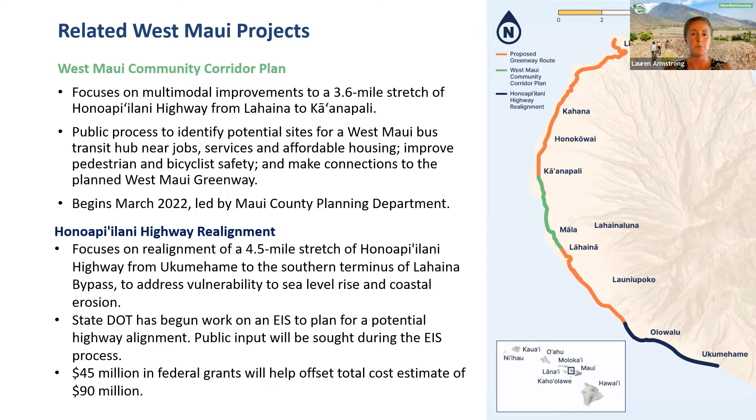Another important project to mention is the Honoapi'ilani Highway realignment. This is a stretch of the highway that needs to be moved inland between Ukumehame to the southern terminus of Lahaina Bypass. This is something the State Department of Transportation is working on. They are seeking public input through their environmental impact statement process, and will have a lot of overlap in terms of planning for the Greenway in that area. So we're also coordinating closely with the state around that effort.

The project vision is to create a safe, comfortable, and joyful greenway through West Maui that serves as a multi-use path connecting people to destinations while highlighting the diverse history, landscape, and culture of the region. The goals that support that vision are to foster community, to bring joy, to strengthen connectivity, to promote safety and comfort, and to ensure feasibility.

Some of the progress we've made on the West Maui Greenway Master Plan over the past few months: we've looked at options for operations and maintenance of the path, governance, as well as different guidance for the design of the path. We've done a lot of work around the alignment of the path, where it should go based on a number of criteria, as well as meetings with landowners and different stakeholders.

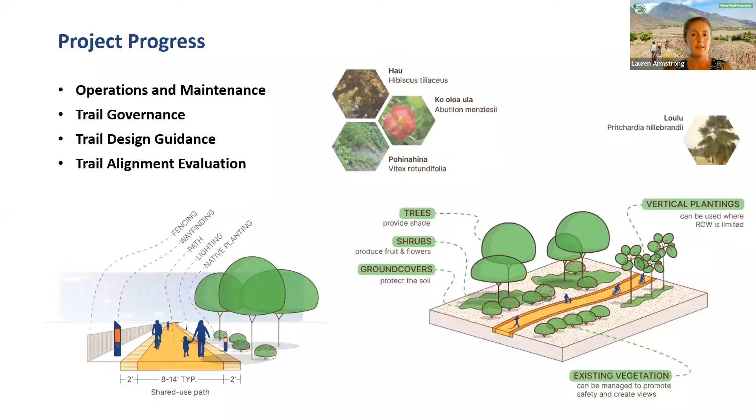Thanks all. So Vesna and I, project manager and principal from Alta, will be walking through the next sections. We're going to start by recapping some of what we heard in the last round of community engagement, and then we'll jump into some of the preferred alignments. Vesna, do you want to walk us through some of the things that we heard last time? And I can weave in how we apply those to our design thinking.

Yeah, absolutely. Our last meeting in March, just a few months ago, a quick recap of who was there and what we heard. We had 32 meeting participants, 52% of the participants live in West Maui, with 44% living in West Maui and 8% both living and working there.

We also asked all attendees which project goals are the most important. You heard Lauren explaining what the project goals are for the project, and overall, promote safety and comfort was voted as the most important project goal. People had the opportunity to choose two, so the next three were actually tied: strengthen connectivity, ensure feasibility, and bring joy. Last but not least was foster community.

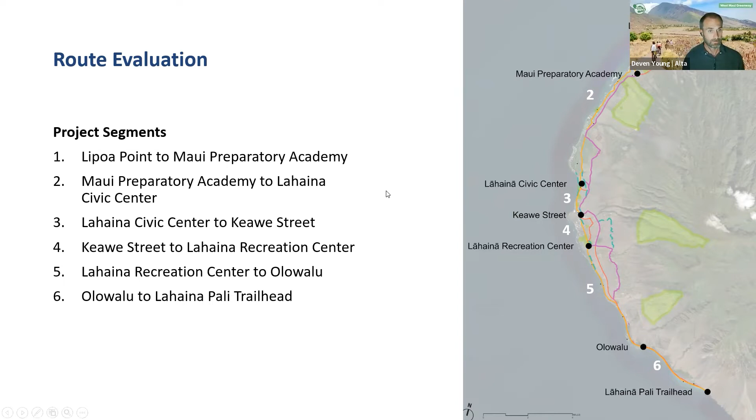So the way we're going to present this—I know you're leaning in to look at these maps—we've got three slides that we'll be walking through. The first slide looks at the alternatives associated with the segment, so this is Lipoa Point down to Maui Prep. The slide after that looks at the evaluation results of that particular segment, looking at how alternative A scored relative to alternative B on these criteria.

And then the third slide, the final slide for each segment, shows the preferred alternative—what rose to the top—and that's the one we've zoomed in on, so you can get a real clear picture of what's rising up as the preferred alternative.

I will note, in some instances these segments are pretty clear cut—we had clear cut winners. But in the case of a long greenway, there's a lot of complexity, right? There are certain segments where alternative A, alternative B, or alternative A and C, or B and C, are actually both considered to be the preferred alternative. The reason is that there are two key criteria where there's some uncertainty right now.

One is on planned projects, timing for planned projects. Lauren had mentioned some of these other projects that are going on. There may be great opportunities to actually link up the West Maui Greenway with the development of another project, but we're unsure where that project is in terms of its implementation schedule. So we didn't want to rule an alternative out that could score very well if a corresponding adjacent project is being developed—we don't want to miss out on that opportunity.

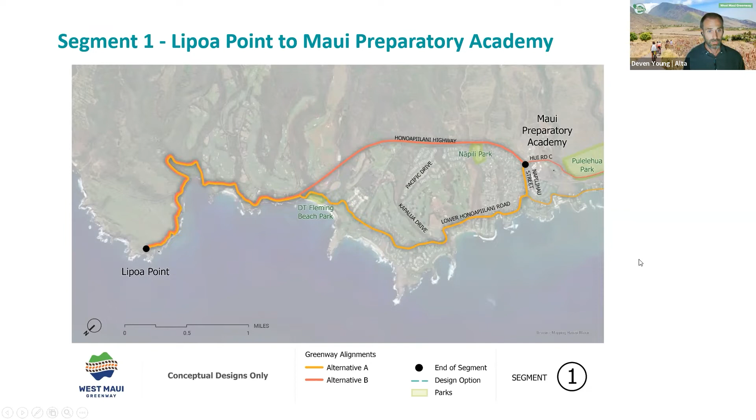So those are the two alternatives for this segment. In terms of our evaluation criteria, alternative B was the top performing, the upper road. A lot of that has to do with promoting safety and comfort. The way this table is organized, a dark gray square scores really well, and a light gray or white rectangle scores poorly.

Promoting safety and comfort, this upper Honoapi'ilani Highway has fewer intersections. One thing we heard loud and clear is the desire for a continuous and unobstructed greenway. With this upper highway, we have a good deal of right-of-way for the greenway to be placed on the Mauka side, allowing a continuous separated path. That's a significant difference from the lower road, where there are several intersections, lots of driveways, and a lot of potential for conflict. That's an example of one key criteria for why alternative B in segment 1 rose to the top.

I'll go to this next slide so you can get a sense of the sequence. This is the preferred alternative here, hopefully visible in full screen mode. Traveling along the highway, at this break is where the upper road really opens up, and we'd be envisioning a separated path - we'll have images of what that looks like later in the presentation. It would be a fully separated pathway on the east side, the Mauka side of the upper highway.

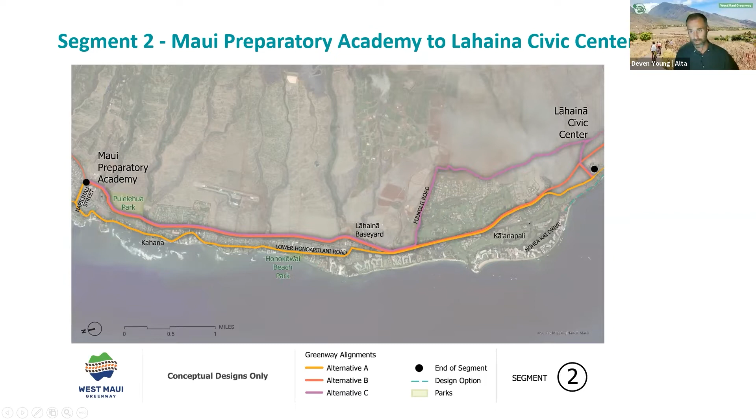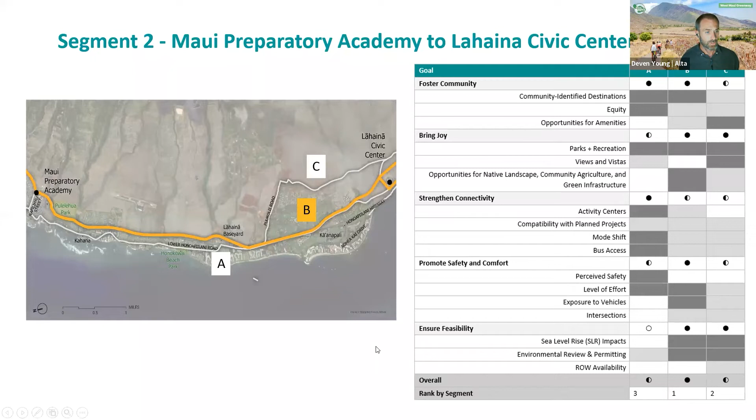There's also a wide stretch there to implement amenities, like landscape or green infrastructure along the corridor - that was a key priority. We also looked at environmental review and permitting. This one scored best and seemed to have the least obstructions in terms of environmental review and permitting.

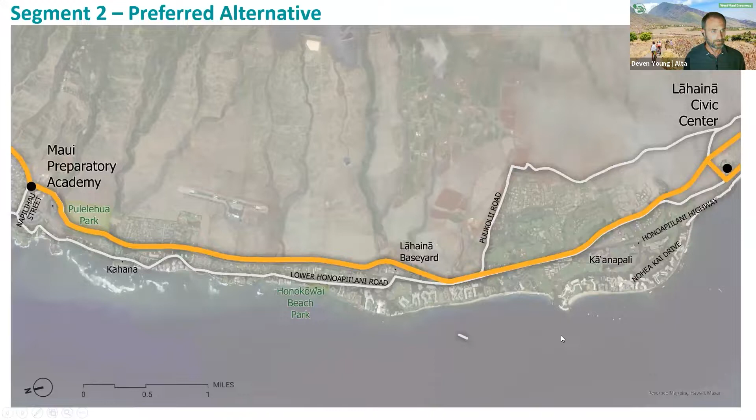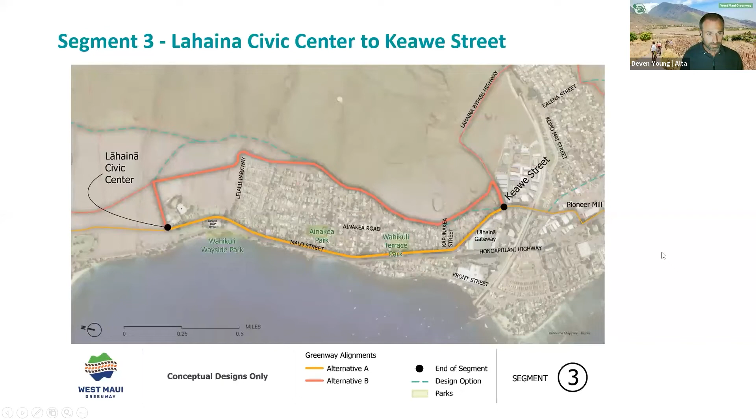So this is an instance where we've really got two alternatives that bring a lot of value. When we first did our initial evaluation, Alternative B scored the highest. This is the alternative that navigates up along cane haul road and then drops down into Keawe Street. But a lot of what was impacting the evaluation was some of the right-of-way availability.

When we reran the evaluation and looked at right-of-way availability along Malo Street, they ended up scoring very, very similarly. So this is an instance where we've got two alternatives, both provide merit, and after much consideration and evaluation, we're saying that both of these alternatives are viable and should be carried forward in the master plan as preferred potential alternatives.

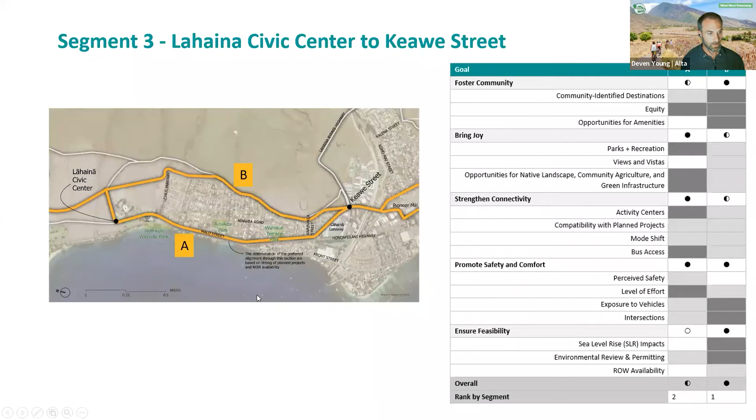So let me go ahead and blow it up here. This is a look navigating from the Civic Center down Malo Street and then up behind Lahaina Gateway, versus the alternative running along cane haul road and then navigating down to Keawe Street.

So two instances where we had our evaluation criteria and our modeling, but as we went back and looked at it and thought about the complexity of this corridor in terms of right of way, we wanted to have an opportunity to keep both alternatives and carry them forward.

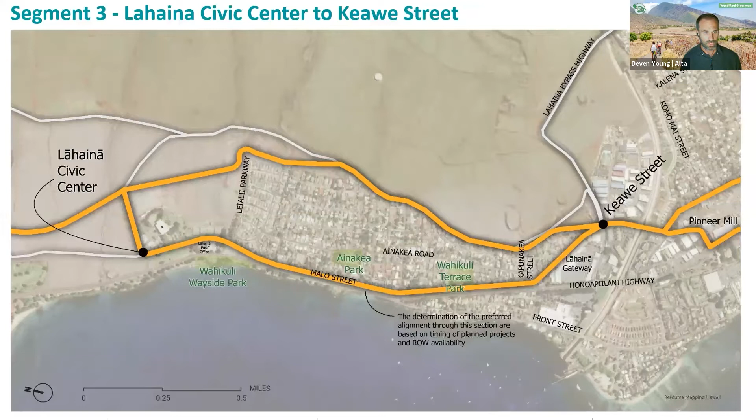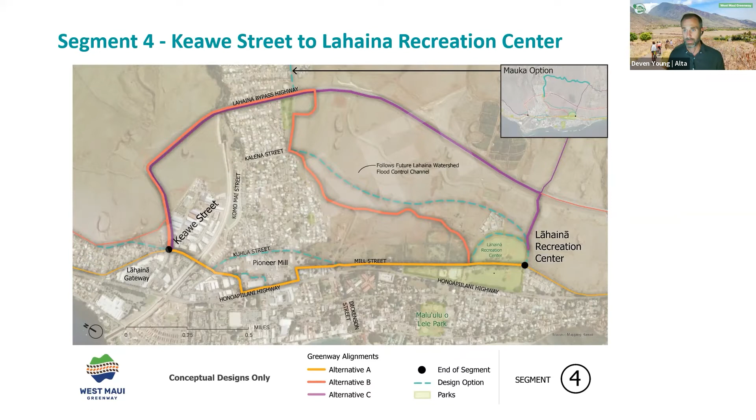And then we have a third alternative, C, that travels up the bypass and then makes a connection down into the rec center. So it uses the bypass predominantly to make the connection to the rec center.

And of the three alternatives that were evaluated in the various design options, Alternative A rose to the top for a number of reasons: things like environmental permitting, perceived safety, level of effort, it's fairly flat, exposure to vehicles, proximity to activity centers. This one scored quite high.

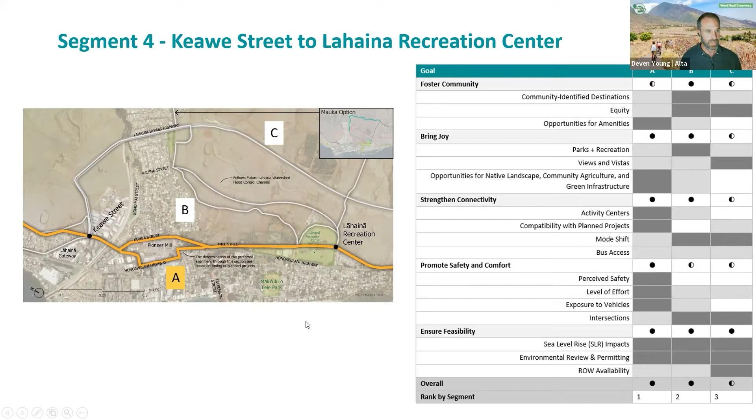And you can see here, we have two alternatives shown. Within Alternative A is the preferred route, and the reason for that is this opportunity for that Kuhua Street extension project.

If that project were to move forward, it would make sense to try to be opportunistic and build the greenway in conjunction with that project. However, in the meantime, there are alternatives that travel down along the train tracks down to the highway, and we want to keep those options on the table as well. So those have been fully vetted, but that travel into Mill Street and make that connection to the rec center.

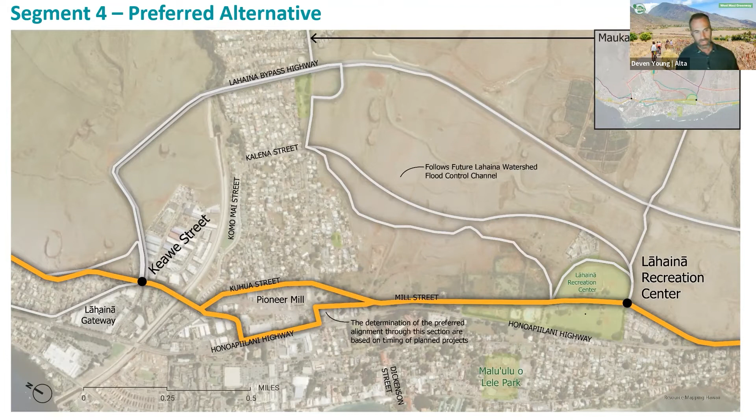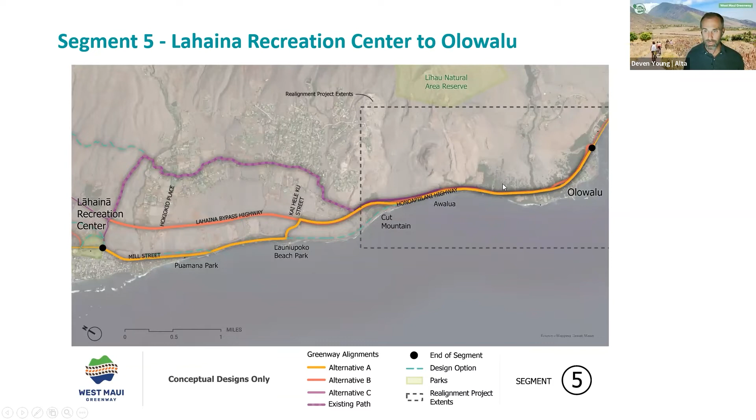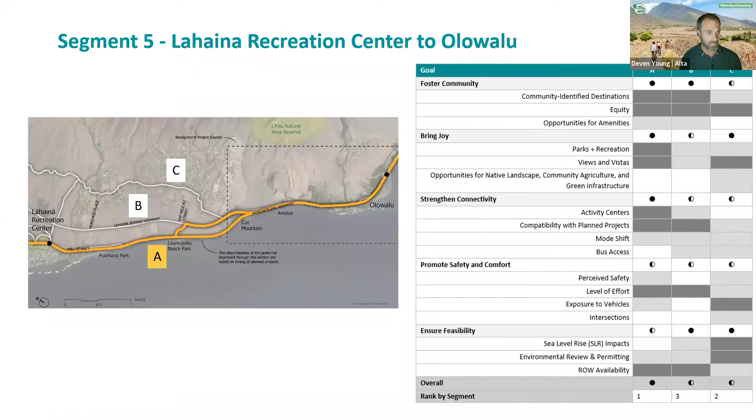In this instance of segment 5, alternative A was the top performer. You can see variations here, but alternative A scored well on opportunities, access, parks and recreation, direct access to Launiupoko Beach, level of effort since it's the flattest route, and right-of-way availability—much of it travels along public right-of-way, a lighter lift than some of the other alternatives.

Let me zoom in here. Just to go through the variations between this split for alternative A at Launiupoko Beach, it's really predicated on the realignment project.

Because if the realignment project were to come through, out by Cut Mountain, you could carry forward along the lower highway, and when the realignment project is done, a lot of vehicular traffic would move off the lower highway and onto the bypass or new highway alignment, making that a pretty seamless connection. But there is uncertainty around when that project will happen.

So an alternative is at Launiupoko Beach to travel up Kai Hele Ku Street and use the existing signal, because from this signal there's actually a pathway adjacent to the current highway that was built as part of the bypass project. You could use that signal and tie into that existing path.

Then travel potentially along cane haul road, but in the case of the realignment, along the current lower highway, which would have much lower volumes and become much more enjoyable to ride, having a fully separated path adjacent to the highway just by doing some reconfiguration, since traffic volumes will be so much lower. So those are two variations, and they really depend on other project schedules.

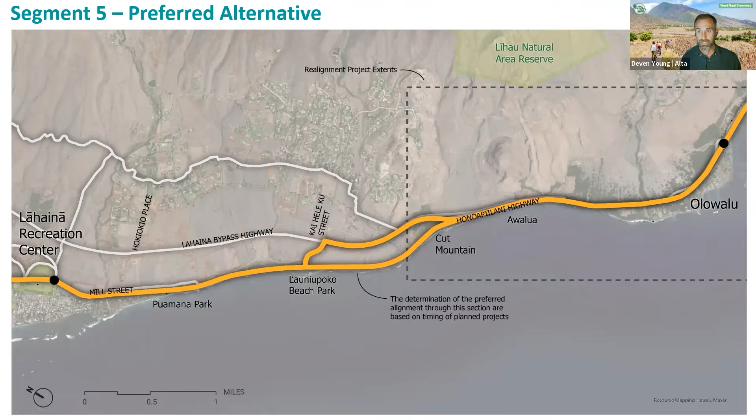But overall, alternative A, following the Mill Street alignment and the lower road, is the preferred choice.

And then finally, segment 6, which goes from Olowalu down to the Lahaina Poly Trailhead. We have two alternatives here: alternative A, which follows the highway.

There is space available, and there are existing crossings too at some of the streets that intersect the highway that are already striped, so that's an option. Or alternative B, which is the cane haul road.

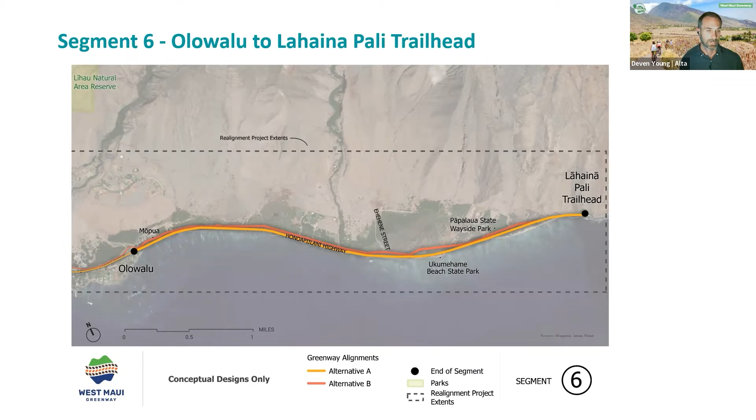Keeping in mind that if or when this realignment project goes forward, that would take a lot of vehicular traffic off the existing highway and open up a lot of opportunity for placing a greenway adjacent to the highway.

In this instance, alternative A was the highest scoring alternative, and a lot of it has to do with access to parks and recreation—there's direct access into Ukumehame Beach.

The level of effort is low since it's fairly flat, and there's lots of right-of-way available. And if or when the highway realignment project comes through, it would make this a very comfortable route in terms of level of stress for greenway users.

So what does that look like here? That's a blow-up going from Olowalu to Lahaina Poly Trailhead.

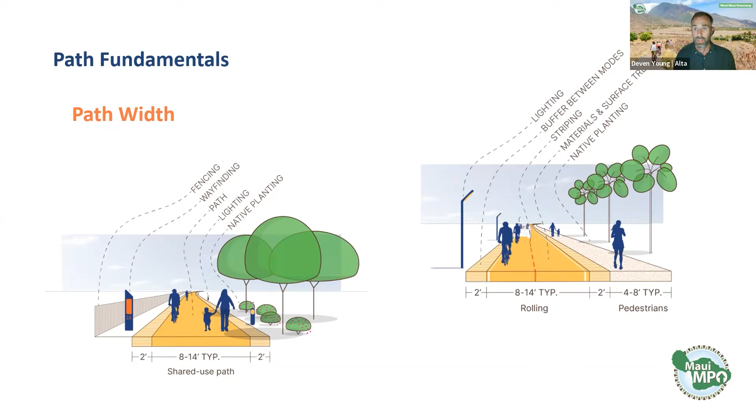When we're considering the greenway, we're considering two types. There's the shared use path, where the minimum path of travel width is 8 feet with 2-foot buffers, so 12 feet total. In that instance, bicycles and pedestrians intermingle on a shared use path. We talk about shared use paths being implemented in areas typically where there's fewer modes and fewer users.

The alternative is what you see on the right here, in instances where there are more people using different types of devices - bikes, potentially e-bikes, people walking, pushing strollers, walking their dog. We promote the separated path. In that case, you have about 8 to 14 feet potentially for rolling users, and then a dedicated pedestrian path of 4 to 8 feet. Typically it's a soft surface, crushed gravel, something friendlier to walk on and roll a stroller on, but less friendly to people riding bikes. It's a way to use a design feature to create a safer, more pleasant corridor for a range of users.

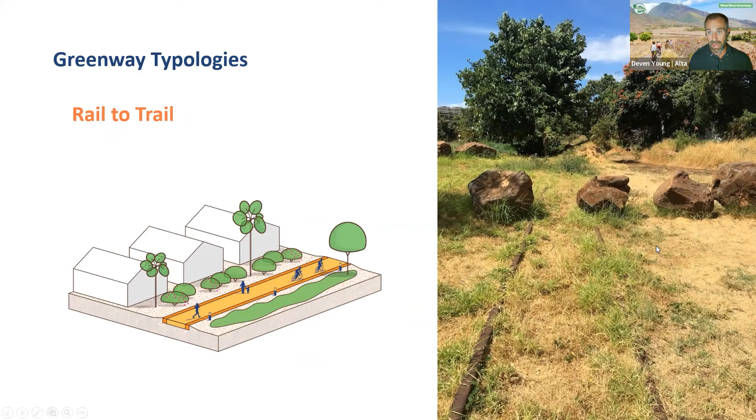So those are the two path width types we're exploring. In terms of the types of path, it was brought up - is the path going to be like this image behind me, this fully separated path? In the case of something like a rail-to-trail or the Mauka Cane Haul corridor, yes. This is an image of the existing sugarcane train tracks, where there's a corridor fully separated from the highway. In that instance, you could implement either a shared or separated path along this corridor.

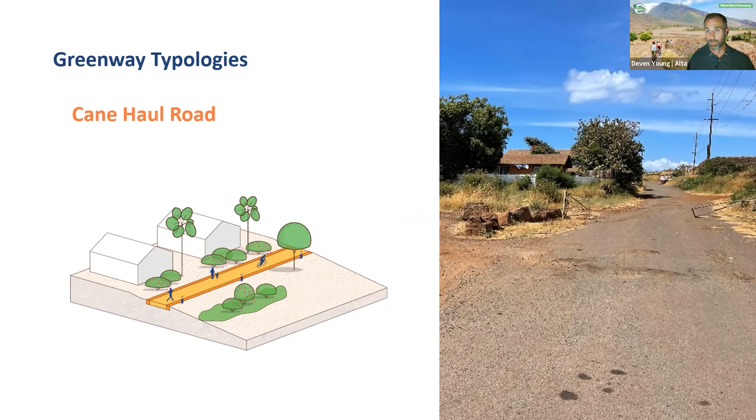Same for the Cane Haul roads - I brought those up. This is an image of the existing Cane Haul road, translating into a dedicated, either shared or separated path fully separated from vehicular traffic. This is an example of the Mauka, more upland Cane Haul road, potentially a bit narrower. We see this farther away generally from activity centers, so it's probably better suited to a shared use path.

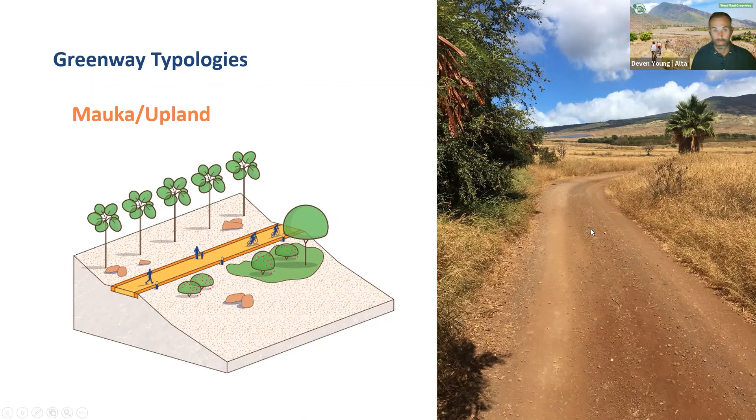This is an image along the preferred alignment that I showed you that's out there. This is what we're describing when we talk about the Cane Haul road in an upland or Mauka environment.

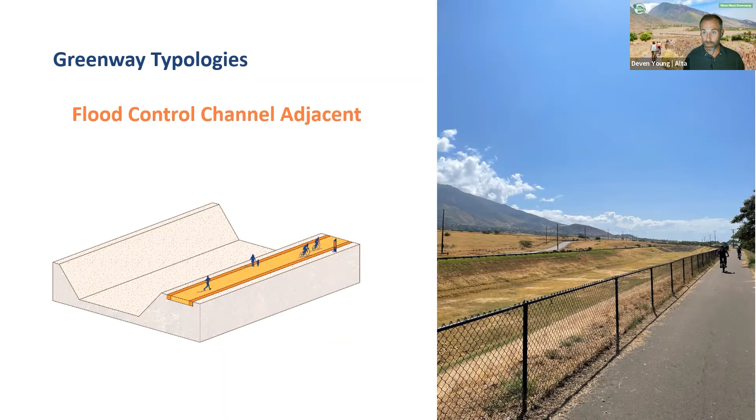In this instance it's a lower volume road, but what we'd propose is likely grade separated, meaning curb height. The greenway would be at curb level, separated by a buffer. We're promoting a minimum of 5 feet for heavier volume roadways like a highway, and a minimum of 3 feet for lower volume conditions. That buffer can be filled with landscape or other barriers to add safety.

This is also along the preferred alignment route that we showed earlier in those maps.

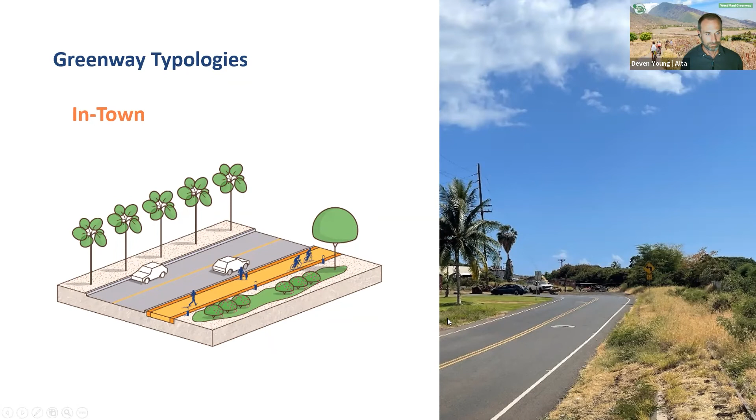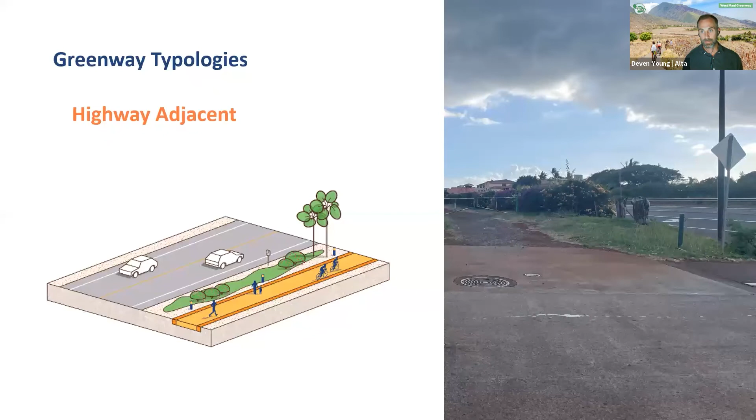There are other instances where we'd need to develop and implement that buffer as part of the Greenway project, and in those cases it would be a minimum of 5 feet. We're still trying to create that fully separated experience, even within the same corridor and proximity as the highway.

We'll be discussing in the master plan implementing green infrastructure as part of this Greenway corridor. The Greenway can provide multiple benefits, and really that's what we're seeking to do—yes, to implement something that gets people from A to B. I think that's our base goal, and that's what we're trying to promote.

But there are other opportunities and funding streams that could support things like additional native planting or integrating cool paving, shading features, and so on, to make the user experience nicer. These are opportunities that could be explored in and along the corridor, using ulu or noni native trees and shrubs and ground cover to promote habitat and more drought-tolerant planting.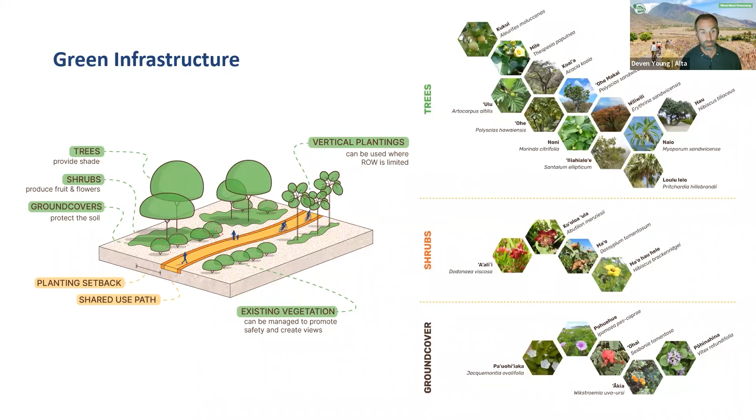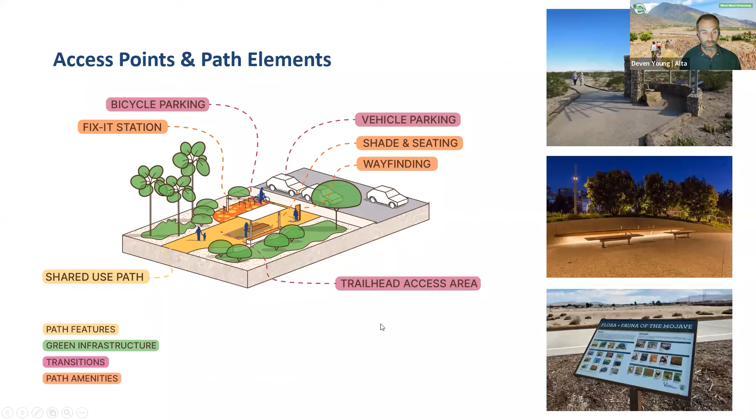We'll have several access points. As you exit and enter the greenway, there's a lot of opportunity for things like bike racks, shading, kiosks with interpretive signage, and lighting to make it more comfortable to jump onto the greenway. Those elements are being considered for the West Maui Greenway and will be included in the master plan, along with important wayfinding components.

There are stretches of the greenway that largely exist already, and wayfinding will be a really critical component to knit the entire corridor together—things like kiosks, but also decision signs and turn signs, so as you travel down the corridor it directs you into Lahaina town or to other key destinations.

To give you a sense of the separated versus shared condition—this is looking at the existing image with the sugarcane train car off in the distance. This would be a separated-use pathway with dedicated space for rolling users, plus an adjacent pedestrian path with potential shade structures, seating areas, native planting, and lighting along the corridor.

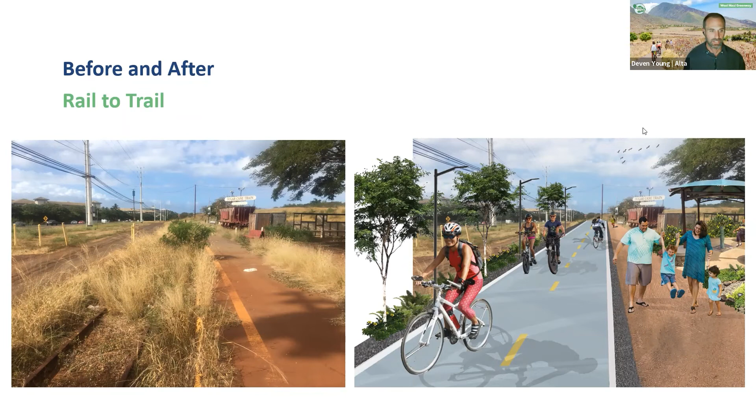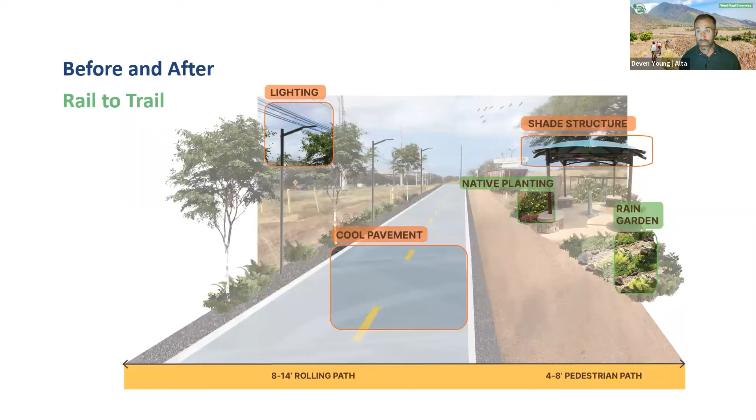To give you a better look at the key elements, this is the 8 to 14 foot rolling path with a 4 to 8 foot pedestrian path. That space is available out there along the sugarcane train track alignment, so that's something we're considering.

Versus a more mauka alignment, where destinations are farther between—this would be a shared-use condition, looking at 8 to 14 feet of shared space, but still with opportunities and pockets for native planting and vertical trees to provide shade while creating that shared-use condition.

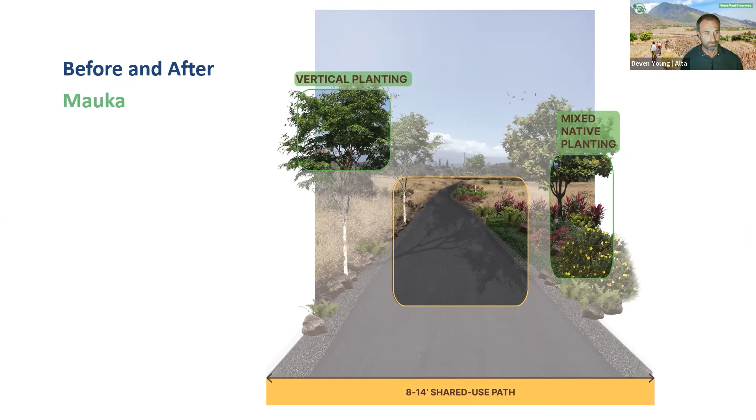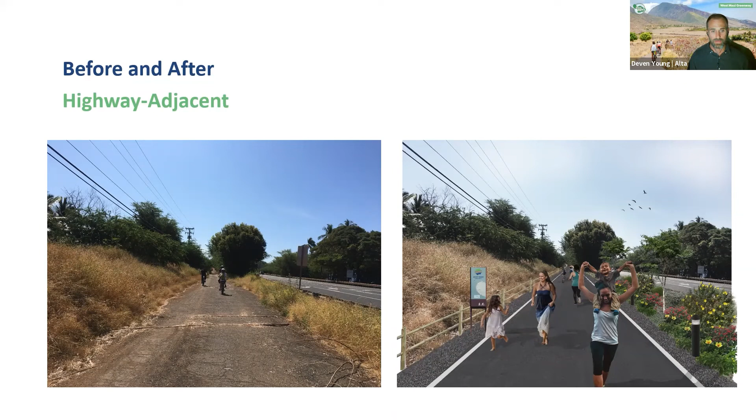In the instance of being highway-adjacent, there's a question about what it would feel like. This is an instance where we have a buffer space between the highway that we could fill with planting and lighting, still having a shared-use condition with wayfinding to create a comfortable pathway.

This is an image looking down one of the Cane Haul roads closer to Olowalu, where we'd be proposing a shared-use condition because it's a less dense area, but still providing some of these features to make a really comfortable path.

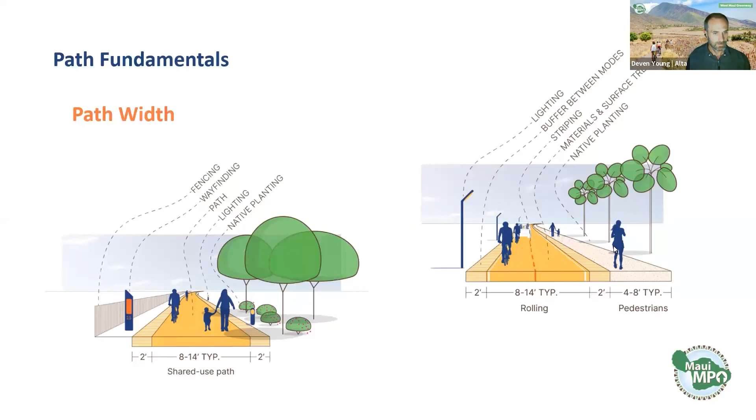Excellent. Before we move on, we just got a few more slides left, but we also got some great comments that came in too. Saman wrote, or maybe it was Saman who signed in using your link, but it doesn't seem like you're neglecting it - your wayfinding points in the slides brought up the thought to emphasize the belief that this also needs to be a service and ideally a draw for commuters, not just pleasure riders. This would be very impactful if it made green commuting safer and accessible to locals.

Thanks, good point. We will have an entire section in the master plan on wayfinding. And there's also a comment here.

For the seats, you can't make it too comfy as it may become a bed. Yeah, that's a great point. You want to make it great for Greenway users and comfortable, but potentially not overly comfortable, and also harder to use by people riding skateboards, grinding, things like that. So we would integrate those features. Thanks for that comment, CG.

Before we transition, the next couple slides will look at operations and maintenance and some other components of that. But before we go on, we covered a lot of ground. We looked at preferred alignment, the potential pathway types, and thank you all for participating in the poll activity with us, where we looked at lighting and different features. Are there any other questions, things that haven't been asked previously, that we can address now before we move into the next section and close out the evening?